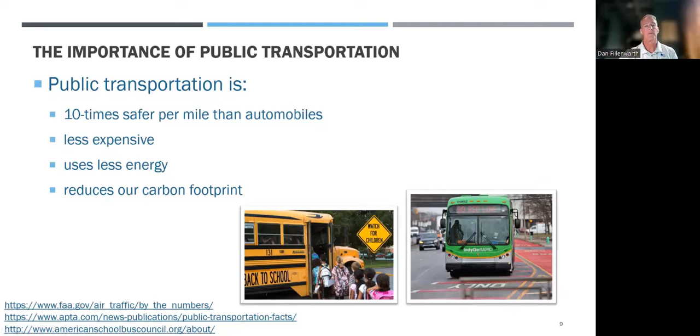People density is inherently high in public transportation settings, and that creates unique transit-related indoor air quality issues. So let's compare the density in a metro bus to a commercial office space.

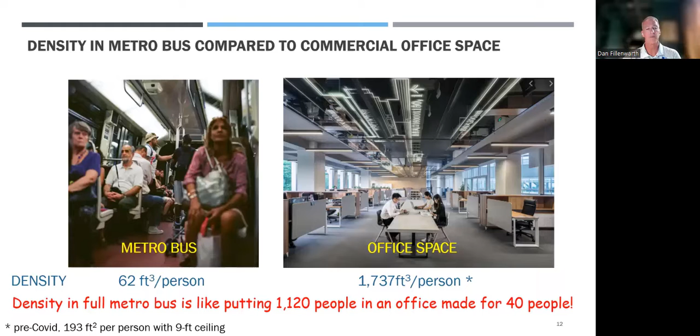Using pre-COVID square feet per person for an office space, the density in a full metro bus is like having 1,120 people in an office made for 40 people. As the return to workplace continues, people are looking for more space per person, not less. Can you imagine the density in a full metro bus being 28 times more than pre-COVID office density?

Similarly, a school bus two-thirds full is like having 275 kids in a 25-person classroom. Children get off the school bus and are told to spread out, stay 6 feet apart as they enter the school building. And classes have been scheduled to minimize crowding in classrooms as much as possible. Can you imagine how parents and teachers would feel if they were told there would be 275 students in a 25-person classroom?

So why make that comparison and talk about people density? Well, people density is important because infection is a function of concentration of contaminants over time. This visual from the New York Times shows an infected student breathing out droplet nuclei that contain viral matter.

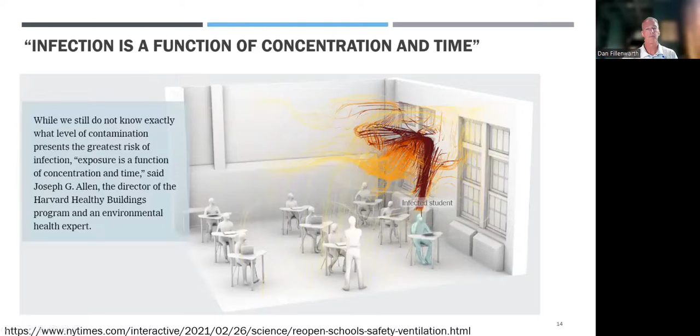If nothing is done to reduce the contaminants that the infected student breathes into the air, they will quickly fill the space, and disease can be transmitted from that infected student to healthy people. This goes not only for COVID-19, which unfortunately is again on the rise in the United States, but other respiratory diseases like the flu and RSV.

So how do we reduce the concentration of contaminants? We can either dilute air in the space by replacing it with outdoor air, or we can filter the air in the space to remove contaminants.

Some important terms I want to touch on: equivalent outside air, or equivalent outdoor air, which is space air that has been cleaned to match outdoor air, which we assume to be free of contaminants. I'll touch on that later.

Another term is air changes per hour. When we're speaking about air changes per hour related to indoor air quality, we're speaking of clean air that's circulated through the space. Sometimes you'll hear air changes per hour referring just to air that's moving through the space. Just moving dirty air around through the space doesn't reduce the concentration of contaminants in the space.

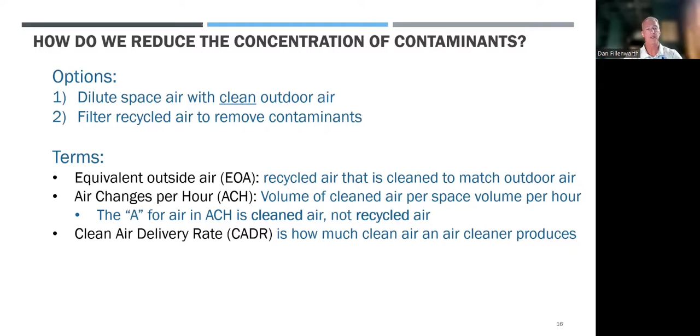And finally, clean air delivery rate, which is how much clean air an air cleaner produces.

An issue specific to transit is the quality of the outdoor air. Buildings have requirements specifying that their outdoor air intakes are not located near the road due to pollution along the roadways. Vehicles, unfortunately, are right on the road, where outdoor air contains higher levels of particulate matter, carbon monoxide, and other pollutants.

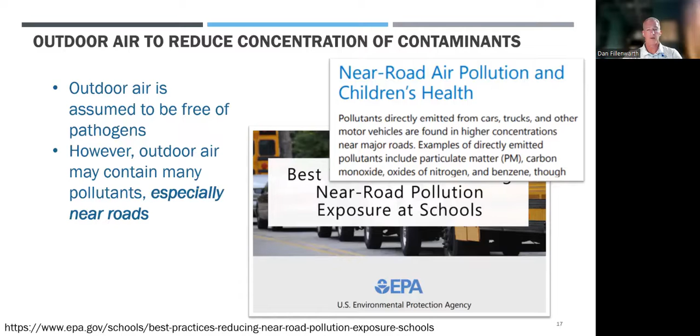Another issue with using outdoor air in transit is the HVAC system capacity associated with cooling and heating that outdoor air. Transit HVAC systems have been optimized to be small and lightweight, since their HVAC systems must be carried with them. If we were to cool Tampa outdoor air design conditions, we would need 4 times as much capacity as cooling air that's already been conditioned. Similarly, heating air from 0 degrees Fahrenheit requires 4 times as much HVAC system capacity as heating air that's already been conditioned.

So that flies directly in the face of our goals of better miles per gallon and extended range for electric vehicles. It makes it difficult to use outdoor air to reduce contaminant concentrations in transit settings.

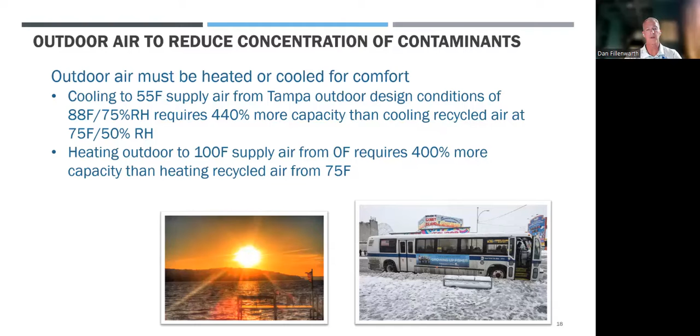I've found in my experience that passenger rail HVAC systems do use outdoor air similar to commercial buildings. They have return air and outdoor air dampers, and that air is filtered. However, typically metro buses and school buses don't bring outdoor air in at all through their HVAC systems. And for the reasons stated on the previous slides, I don't think they will in the near future. So since outdoor air is not the solution, we must rely on filtration.

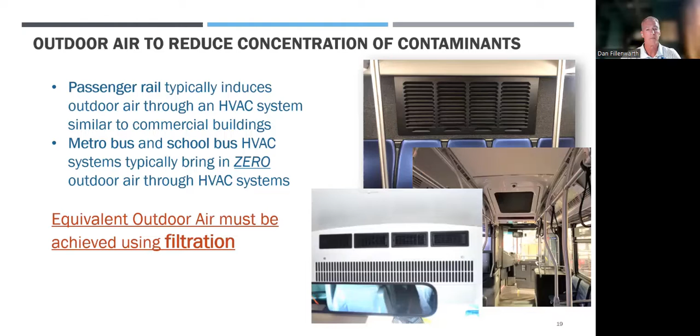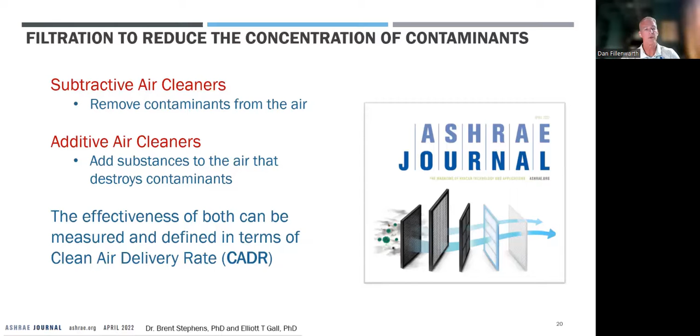ASHRAE's April 2022 issue provided a prescription for evaluating air cleaners. Air cleaners can be described as either subtractive or additive air cleaners, and the effectiveness of both can be measured and defined in terms of clean air delivery rate, or CADR. It's also important to evaluate how that clean air is delivered to the occupants.

The CDC says to increase filter efficiency as high as possible. MERV 13 filters are recommended by ASHRAE. The U.S. Environmental Protection Agency just recommended MERV 13 filters in its Clean Air in Buildings Challenge earlier this year. And I think as you can go higher in filtration efficiency, the better.

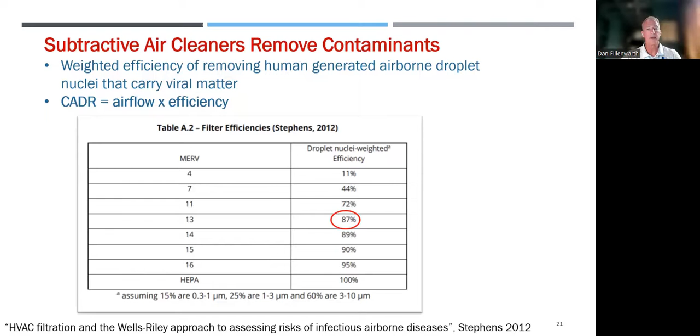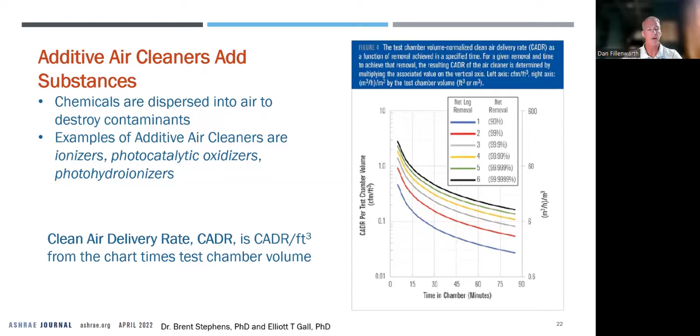Let's look at the example of a transit HVAC system at 2,400 cubic feet per minute, which would be a typical metro bus situation. Let's calculate the clean air delivery rate, or CADR, for both a subtractive and an additive air cleaner. In this case, we'll look at a MERV 13 equivalent filter and an additive air cleaner that was lab tested to reduce greater than 99% of SARS-CoV-2 in 1 hour.

For the MERV 13 filter, the clean air delivery rate is simply 87% times the amount of airflow through that filter, which gives us a clean air delivery rate of 2,088 CFM. For the additive air cleaner, we use the chart at the right to find the intersection of time and percent effectiveness, giving us 0.09 CFM per cubic foot. Then we multiply that number by the test chamber volume to come up with, in this case, 90 CFM. That's a dramatic difference, which may be surprising to some people.

There's also an online calculator I want to mention on Portland State University's website, which allows you to consider how much natural decay occurs without the additive air cleaner on, and then calculate the numbers that I show in the chart.

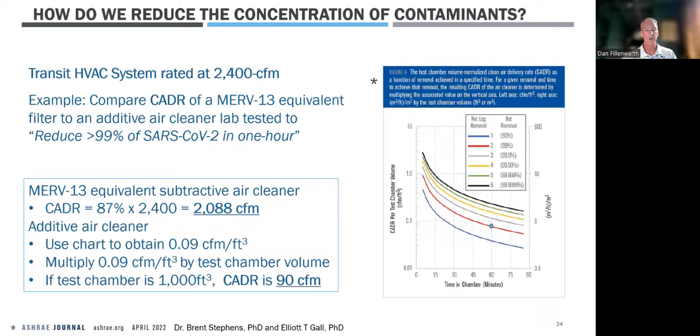So just a summary so far: public transportation is necessary, it's widely used, and people density is high in public transportation. Disease transmission is a function of contaminant concentration, which goes along with that high people density. Outdoor air for reduction of contaminants has limitations we discussed in transit. So filtration in transit is imperative, and due to the points above, especially the people density and lack of outdoor air, we should at least try to achieve the levels of filtration dictated for public buildings.

With that, I want to turn over the presentation to Rich.

Thanks, Dan. So high efficiency filtration. Can you guys hear me, by the way? I just want to make sure. I'll take that as a yes.

High efficiency filtration brings with it its own set of challenges. Increased pressure drop is going to require higher fan speed to maintain airflow. Most often, the fans are limited to speed, so the consequence is reduced airflow. This has other drawbacks like reduced performance and potentially frozen coil. The choice has really been either use substandard filtration or have higher maintenance requirements, assuming your fan can handle it.

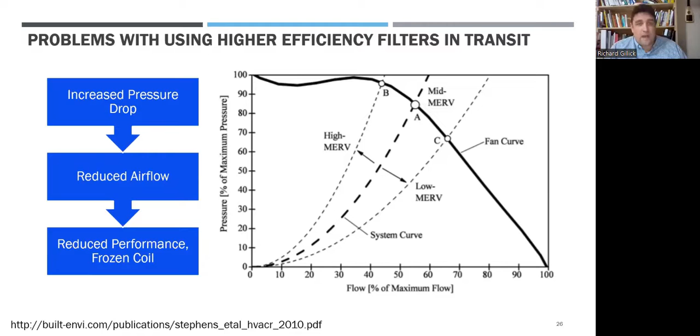Because of this, many in the industry have limited their media to MERV 7, which is really unfortunate, just as Dan showed earlier. And that's assuming, again, that the fan can handle even that level of static pressure.

So just to show you, here's some of the filtration we've seen in the industry. You can see everything from a MERV 2, MERV 4, and MERV 7, which are that passive filtration currently being used in the industry, or phasing that out. We've heard from one public rail customer who has switched to MERV 13 that now they're being forced to change their filters every week. So as opposed to being able to extend that out at least months, now they're down to doing filter changes every week.

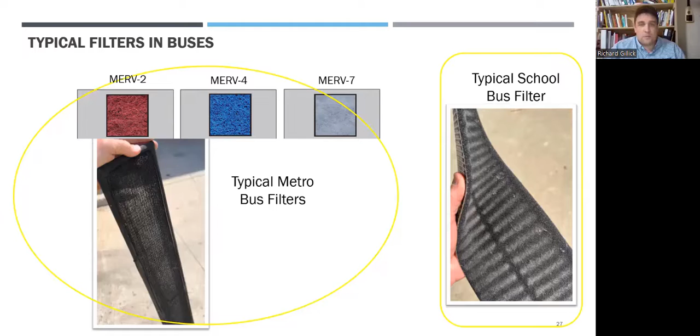Other customers have switched to what's known as polarized media. Polarized media is still a subtractive technology that combines a passive medium with polarization and agglomeration. As you can see here, and as the video plays, there's still a media there. And as the particles come in, this polarized media adds electricity to it.

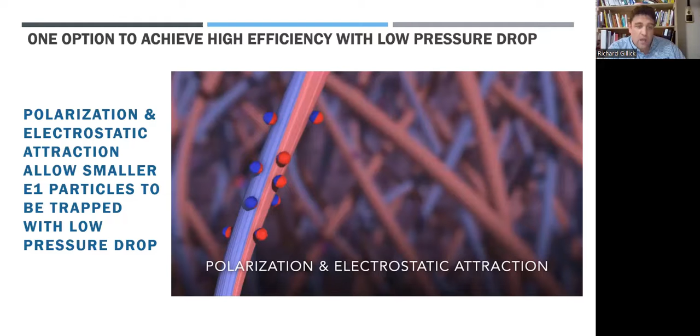As particles come in, they come in negative first, positive out, and they're able to form all the way around every fiber. That gives the customers or users three benefits: maintenance savings, because instead of just loading up front, you're loading 360 degrees around every fiber. You're going to have energy savings because the fibers don't have to be as close together, and you're still getting that high efficiency performance.

You can see here where a passive filter is only loading up front, whereas this polarized media is loading 360 degrees around every fiber.

Now, I told you there's three benefits with this polarized media, the third being agglomeration. What agglomeration is, is polarization at a sub-micron level. As it turns out, the smaller the particle, the more the polarization acts on it. So the really small stuff is not only binding with the fibers, but bonding with each other and other particles as well. You're turning small particles into bigger particles and making them easier to capture, especially in a recirculated environment like public transit.

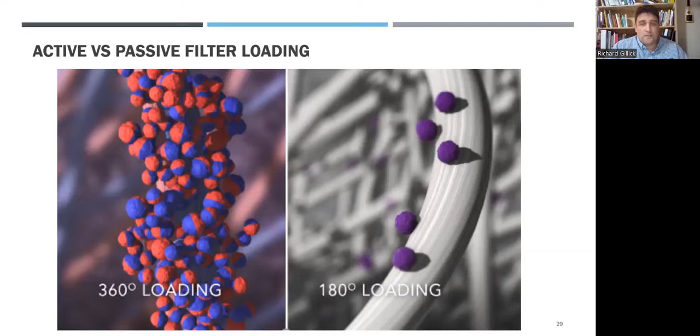Before we start this video, let me explain what's going to happen here. This is a polarized panel in a very small chamber, and inside that tube there is a cigarette. What they're going to do is pump it up with smoke. Go ahead and play the video now, please.

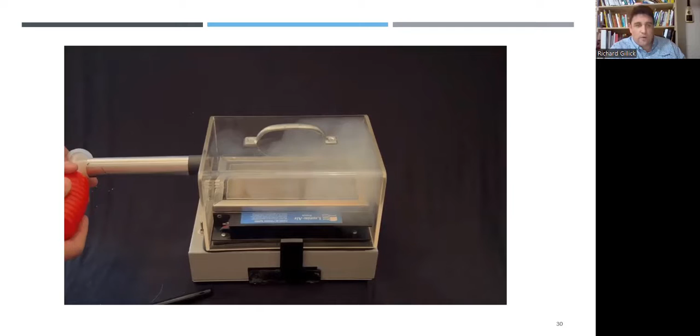You're going to see as he's pumping it up, obviously cigarette smoke, we're all familiar with it and the problems with it, but it shows how well you can get that smoke filled in there. The first thing he's going to do is turn on a fan, which just circulates that air throughout the media. And you can see there, without the electrical charge, nothing's really happening.

But once he turns on the electrical charge to the media, you can see here the media is able to quickly draw those smoke particles out of the air. This is a good visual on essentially upgrading passive filtration with electricity to create that polarized field. And this is what you're able to see.

Now, for the customers that are dealing with the fires on the West Coast, this has been a game changer. But it also shows, for those people who want to breathe clean air, this is a good solution for them as well.

So how do these MERV 13 equivalent filters perform in a transit application? A customer had an air balance test done. Instead of putting in sensors to check pressure drop upstream and downstream, they really just wanted to know their airflow. So they had an air balance contractor come in and test this new polarized media against what they were using with their MERV 4 when it was brand new.

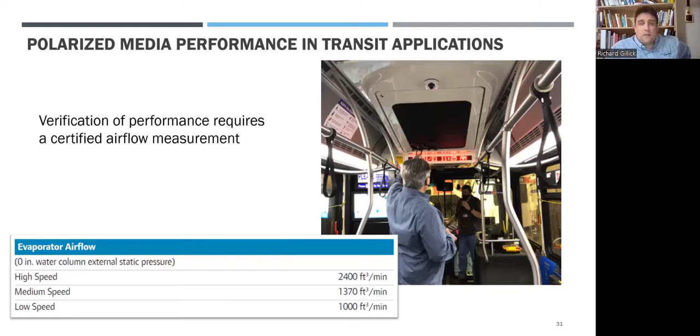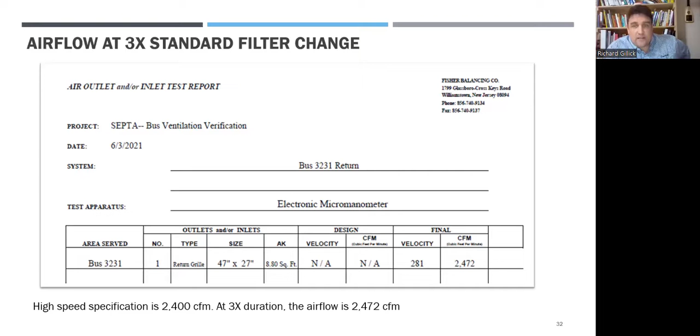Again, this air balance test shows that at 3 times the standard rate, they were still able to achieve that MERV 13 performance. Now, other transit companies, instead of using 3,000 miles, have used 6,000 miles, and my understanding is that they're still able to see that same level of airflow at the 18,000 mile mark.

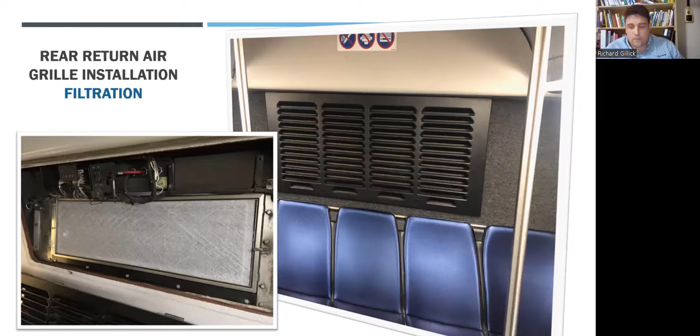Here's some pictures. The one on the right is the back of the bus, and on the left, taking off that panel, you can see that filter media in there. Now, the polarized filter frame, that metal frame all around there, stays with the bus or the train, and it's just the media that gets changed out. It's that white part that gets changed out.

So now, after looking at a bus, let's look at a rail installation. You can see where those guys are standing on that picture on the right—that's where the return is, and that's where they elected to replace the passive filtration with polarized media.

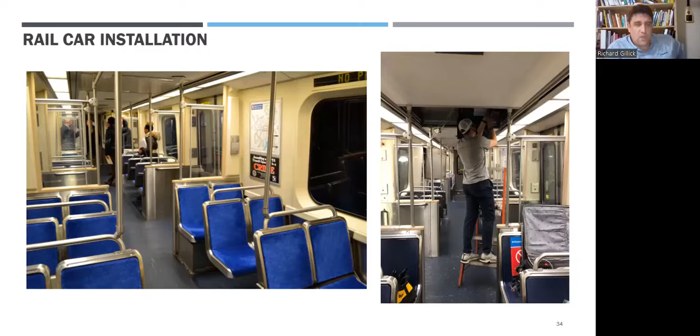A closer view: that's the return grate on the right, and on the left is the polarized media.

The rail company that did this decided they not only wanted to use polarization, they also wanted to use UV as well. With this polarized media, they're able to combine it with UV because it's a glass-based media.

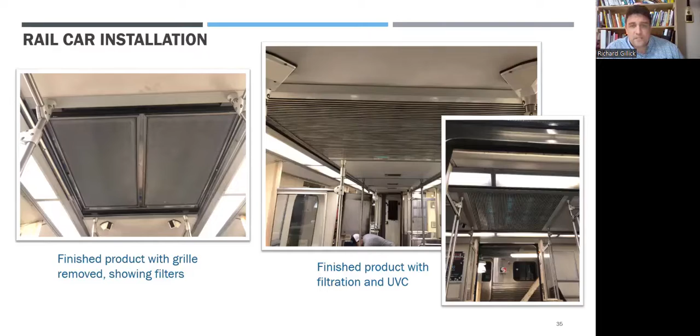So in summary, for the rail and bus portion, public transportation is necessary and still widely used. People expect that not only in public buildings but in public spaces in general and in public transit, their air will be clean. People are becoming more aware of the questions to ask and are starting to think about what air quality means, and it's incumbent on building owners to provide what their customers are expecting.

Regarding people density and outdoor air quality, a lot of times you would position your air intakes to keep dirty air away—often meaning highway air. But with public transit and trains, you're in and amongst it, and you're producing some of that pollution yourself, so you can't get away from it.

Higher efficiency filtration is difficult but not impossible to achieve. With the technology out there, we really need to recognize that customers are starting to see they need to provide what their customers are asking for, especially with this higher efficiency filtration.

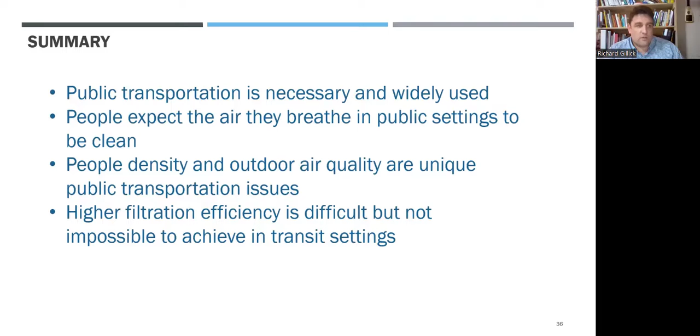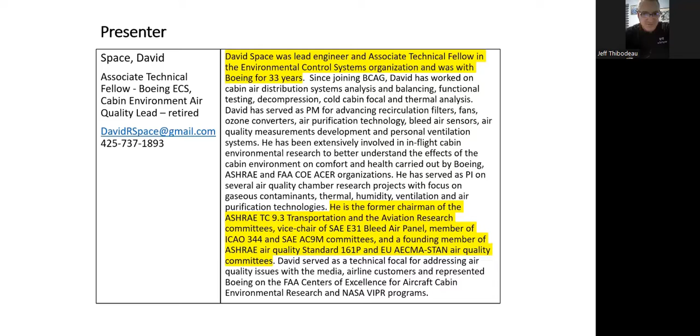David, go ahead. Next slide. Can you hear me okay?

Okay, so I'm going to start talking on aircraft filtration, but I'm going to start with talking about the operating environment of the aircraft itself.

When the aircraft is in flight at 36,000 feet, it's a very hostile environment. It can be very dry, less than 1% relative humidity. Very cold—minus 45 degrees Fahrenheit, minus 43 Celsius on a warm day, minus 85 Fahrenheit, minus 65 Celsius on a cold day. Very low pressure, less atmosphere than at the top of Mount Everest—airplanes fly higher than 29,000 feet. And depending on latitude, altitude, and time of year, you can also experience elevated ozone.

So to operate in this environment, we need advanced environmental control systems. Next slide, please.

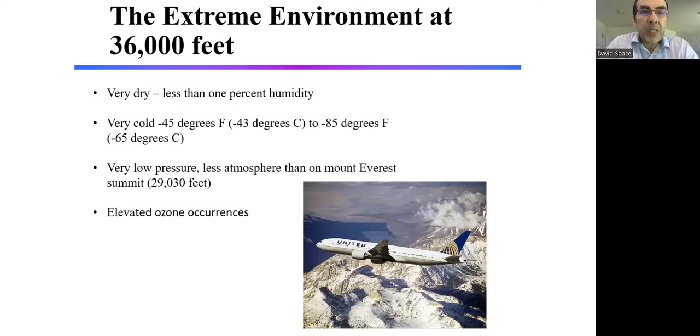That's kind of a separate topic unto itself, but since this discussion is more on filtration, air distribution, and spread of disease, I'm going to keep it centered there. So I'm going to talk about our cabin air distribution system.

Half the air coming into the cabin is outside air, so it's quite pristine at 36,000 feet. The other half comes through HEPA filters, on a continuous basis. So the air leaving the cabin—half is dumped overboard, half goes through the HEPA filters—and it just continuously flows that way.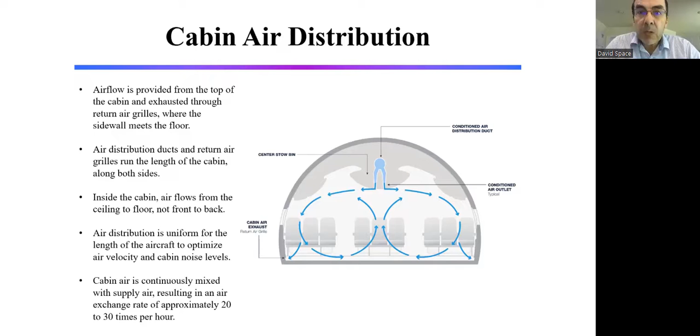Because of the temperature control we need to maintain during cruise, we need fairly high air exchange rates. Our air exchange rates on the airplanes average 20 to 30 times per hour—quite high to be able to do that.

Next slide, please. So let's talk a little bit about filtration. Our first filtered aircraft was a Stratocruiser back in the 1940s—very coarse, basically metal mesh for keeping big things from going into the fan. But in the mid-80s, the 767 and 757 came on board, and we had HEPA type filters, 2-piece filters—a pre-filter and then a HEPA type filter, about 95% efficient, I think about a MERV 16.

Working with the suppliers from that time frame, we were able to improve their internal processes and increase the efficiency of the filters to the point we were able to get up to true HEPA filters on our production airplanes.

So you'll see on the airplanes today, including Airbus and Boeing aircraft, the recirculation systems use true HEPA filters, essentially able to remove all particulate matter from the air, including single viruses, bacteria, and tobacco smoke. There's a little dip in efficiency around 0.1 to 0.2 microns, but even there it's 99.9% plus efficient at removing those particle sizes. The efficiency goes up for smaller and larger particles, which gets into the capture mechanisms that HEPA filters use.

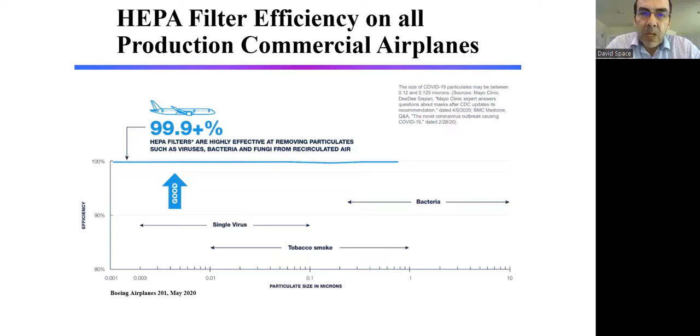Let's talk about spread of disease on aircraft, an area of real interest. When COVID first hit, air travel dropped 50% domestically and over 70% internationally, so it really impacted the aviation industry tremendously.

There was a big study done by the Department of Defense called Transcom, looking at the risk of spread of disease in aircraft. If somebody was to cough or sneeze, if you're sitting next to that person, what exposure would you see? Or if you're sitting several seat rows in front or behind, what exposure would you see? They were looking at this from the perspective of potentially using commercial aircraft to transport military folks, so they were concerned about that. They did 8 days of testing, did risk assessments, and I'll walk through some of the testing and results. They did breathing and cough scenarios for both.

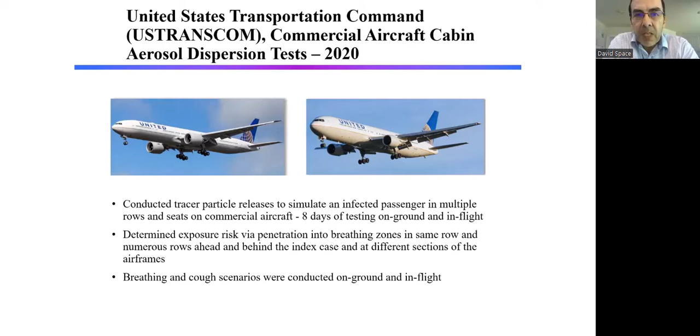This slide shows their test equipment and methodology. They used a breathable mannequin that could breathe out, simulating a cough or simulating breathing. Then they used IBACs, instantaneous biological analyzers, which could be placed in the same seat row as the mannequin, the index case, or multiple rows in front or behind. They ended up using 42 IBACs each time, so they could basically surround the index case. They did this in the economy section, business class, and first class, with over 300 releases. Each release was 180 million fluorescent tracer particles released into the air that could be detected by the IBACs, with particle sizes of 1 to 3 microns.

They also wanted to look at surface depositions, so they did some DNA-tagged tracers to measure aerosol depositions as well.

This is some of the actual data. It's small, so I'll explain it. The red box is the index case, so 100% of the contaminant is coming from those 180 million particles being breathed out. Surrounding that is the amount of particles that penetrated into the personal breathing space of that particular passenger, with the IBAC set at breathing height for inhalation. What they found was that even in the worst case out of all 300 test simulations, 99.7% of the particles do not penetrate the breathing space, even if you're sitting adjacent to the index case.

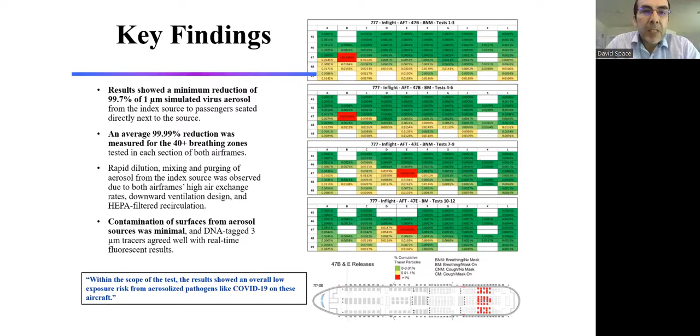So in conclusion of that study, the results matched really nicely with our computational fluid dynamics modeling. Working with the Harvard folks, who've also done epidemiological studies, those matched up nicely as well. As I said, maximum exposure nearby was 0.3% out of all the testing—in other words, 99.7% did not make it to the breathing space. The study then compared air exchange rates and time to remove 99.9% of the particles released.

If you look at a typical home, 4 air changes an hour takes a little over 100 minutes. Operating rooms and isolation units, with about 12 air changes an hour, take about 35 minutes if a person coughs to remove 99.9%. The aircraft—this was a 767 and 777, both wide body aircraft.

Much quicker, 6 minutes or less. Standard body aircraft, narrower aircraft, tend to have even higher air exchange rates than the wide body aircraft.

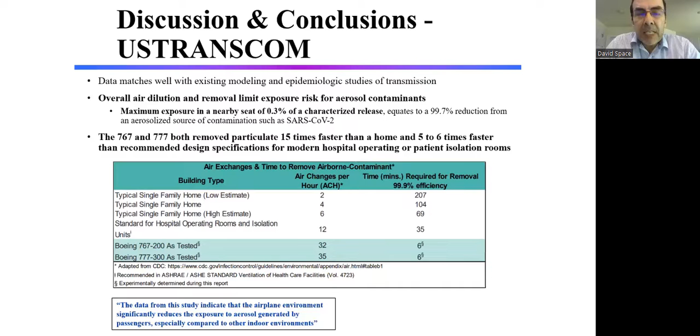So the reasons why we're seeing the results that we're seeing is there are some unique design features of aircraft, as I mentioned, the high air exchange rates.

Every 2 to 3 minutes, whereas a typical building is 2 to 5 air changes per hour rather than minutes. Our airflow is from ceiling to floor, which tends to push contaminants down and out. So there's a continuous push in that direction.

There are also high efficiency filters used. And then the seats themselves, we've seen from our modeling, serve as a barrier to a degree. If somebody's coughing or sneezing, it channels and keeps the contaminant in that area. We also design and balance the airplane so we minimize airflow in the fore and aft direction of the aircraft.

Harvard University, several professors there had a panel that looked at all the scientific evidence, and their conclusion was that a very low number of infections could only be attributed to exposure on aircraft. They came to the same kind of conclusions. So what are some unique design features that help minimize the spread of disease?

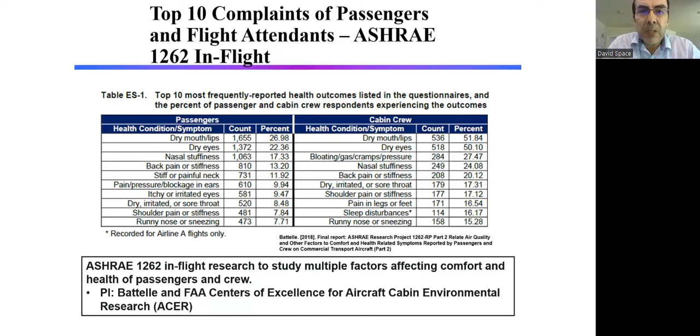There are some seat-related symptoms, back pain, stiffness. Same thing with the cabin crew — there are some really good studies done on cabin crew showing very similar symptoms: irritation to the eyes, irritation to the nose and throat. For multiple flights a day, like shuttles, you also get pressure issues on the intestines going up and down, with some bloating, cramps, and so on.

Okay, next slide, please.

A few years back, we went to the Technical University of Denmark, one of the leading universities in the world for air quality research with human subjects, and did 4 years of research with them. We wanted to look at the effects of different ventilation rates, temperature, humidity, and air purification technologies. One thing we learned is we could readily simulate the same types of symptoms people see in flight — we were able to key in on producing a similar contaminant signature, using used carpets, used seats, people, high density.

What we wanted to do, and did do, is reduce the outside airflow from 20 CFM outside air all the way down to 3 CFM outside air, and at the same time increased the HEPA recirc air to maintain a total quantity of 20 CFM. What we found is as we dropped the outside airflow, humidity symptoms and irritation from humidity get better — the air gets more humid, but you start to get a buildup of gaseous contaminants to a degree.

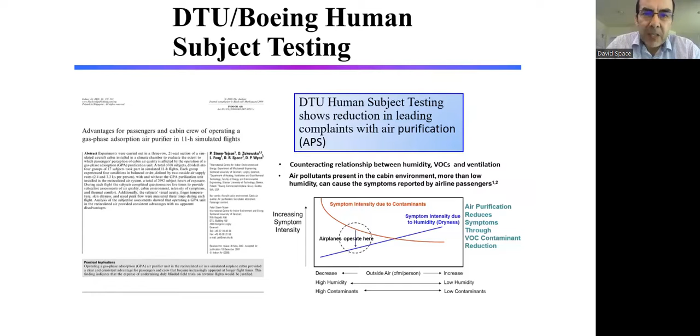So this is one of several slides. I only stuck just one of these in here, but there's over 6 pages worth of data. This is in-flight research done by EASA.

What you see across the data set, the hundreds of volatile organics, is the 787 was virtually lower on all the contaminants, from the mean to the max. Next slide, please.

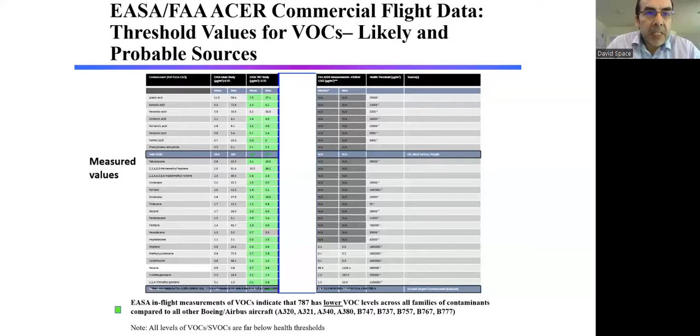If you look across studies, going back a decade or so, there's the Spengler study, that's the big ASHRAE 1262, we showed some data on that. There's also Chinese research, MHH over in Germany, and then the EASA data we just looked at.

If you look at just a typical marker compound, toluene, the 787 was lowest. But if you sum up the VOCs across decades of research, again the 787 is lowest. And then you have to ask why. It's the only aircraft flying that has air purification built into the aircraft.

That came out of the DTU research. So I would definitely be an advocate to see the technology evolve onto other aircraft as well. I think everybody would benefit from that. APS was the prime factor improving air quality on that aircraft. Next slide, please.

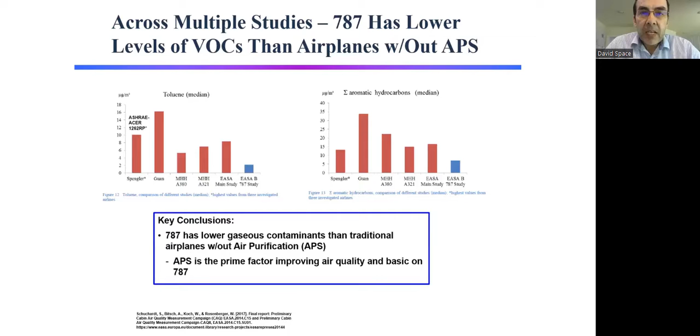If you look at the regulations today for air quality, the FAA, the regulator here in the US for aircraft, specifies outside ventilation of 0.55 pounds per minute. It doesn't account for HEPA filters, it doesn't account for the air exchange rates or top-to-bottom airflow, and it doesn't account for air purification.

We can do better. I think the industry will move to performance-based regulations rather than just having one prescriptive value. I think future systems will be smart systems with variable outside and purified airflow, and a really important part of these systems will be filtration—both particle filtration and gaseous filtration. So you can optimize, have higher humidities, lower gaseous contaminants, improve health symptoms, but also improve fuel economy and have a greener airplane.

And that is my last slide. So I appreciate your time.

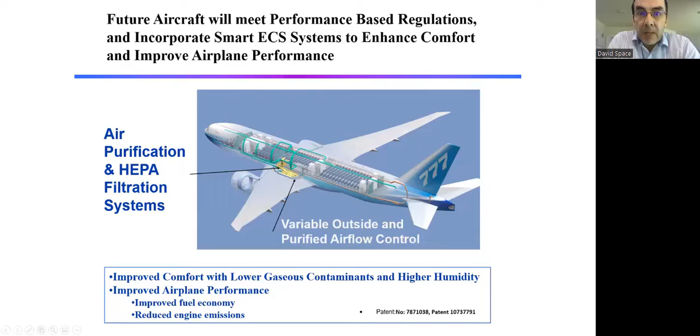Gentlemen, thank you, some great stuff. We have some fantastic questions. David, we'll stay with you.

A few people have asked what the preventive maintenance or filter change schedule is for aircraft. Is it set by Magnehelic and pressure drop, or is it set on a time-based schedule per hour?

Boeing will give guidelines on that, but you can imagine if you're an East Coast shuttle flying 5 flights a day, you're going to have a different contaminant load than an operator flying only transatlantic type flights. Typically, filters are changed out about every C-check, so about every 1,200 to 1,800 hours—about once a year is typical. But some operators find lint is a big factor for filter life, so if you're doing multiple flights a day, you'll build up lint on those filters quicker, and those airlines will change out their filters more frequently than those flying transcontinental or Pacific flights. So there are adjustments by airlines, but typically 12 to 18 months is common for change-outs.

Okay, we'll stay with you as well. Can you talk about when the airplane is not in motion and it's hooked up to the jetway, people are boarding and disembarking—what is the path for air filtration while it's hooked up to the jetway?